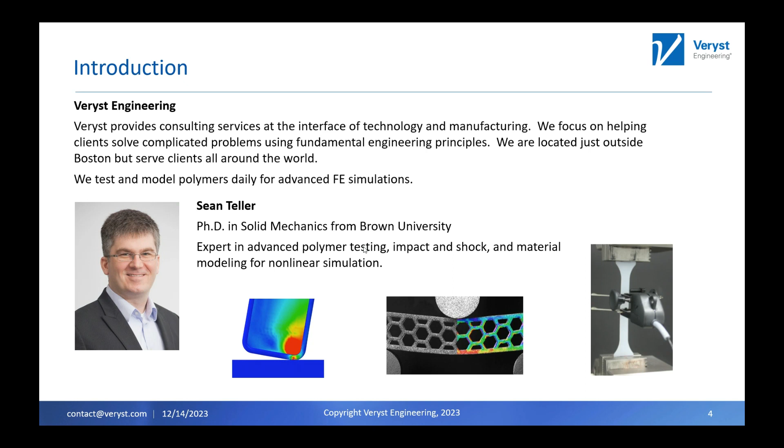And a lot of the work you're going to see here today, some of it was done by me. A lot of it was done by other engineers of us working in a group. So there are definitely a bunch of people here at Veryst who contributed to this. But these are really test methods that we have developed over the years based on client feedback and what we saw going on in industry and some challenges that we had and how we've overcome those challenges. So we want to talk about some of those capabilities.

And the first question might be, what do I mean by small samples, which we're going to show multiple examples of, but why do I need to test those small samples? And a lot of times we get a little bit of pushback from clients at the beginning that says, why do you need to test this? It seems like you're going to a lot of trouble. Why can't you just do a normal test? Why can't you use this other material? What's going on? Why are you doing this?

The first answer is that sometimes that's what we have, right? A lot of materials that we get are very thin and small. So for example, polyethylene films are used extensively in batteries. And ePTFE membrane, so that's expanded PTFE, are used in a lot of medical devices and consumer products. And these are all manufactured by extrusion. So you take these materials, you put them through some rollers at high speed, you squish them down, you extrude it out. So that stresses and yields the material already. It's just like cold working a steel beam or something like that.

And so the material properties that you get at the end of that film depend on that manufacturing process. So how they're extruded matters. So we can't just take a larger, thicker film of this ePTFE or PE. We need to use it as manufactured, because even testing a film that's 3 microns versus 100 microns made by the same company will have different properties, because those properties are dictated by how they're extruded.

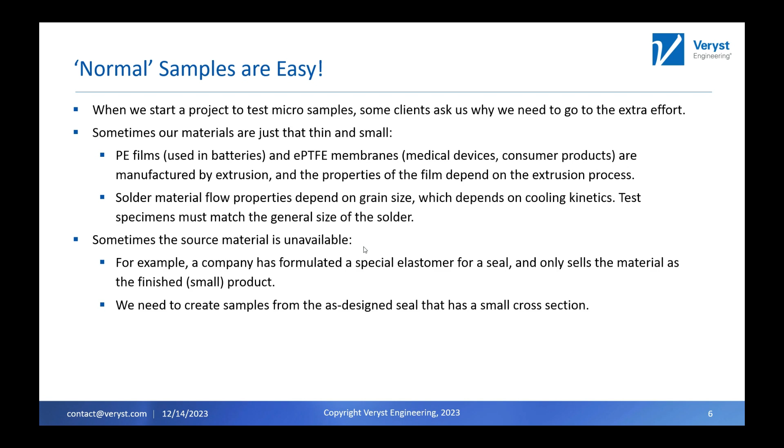And taking another step back, you might ask, well, why can't we just use a standard? Well, most standards don't anticipate these kinds of hurdles that you're going to have to overcome. And standards are really great. I'm showing ASTM and ISO up here. Those are two, one in America, one's international, but it's more European, I would say. But they both do great work. They have a lot of similar standards. I wouldn't say one is better than the other.

But they're designed to be able to run the same test at multiple different labs and get the same result. It uses standard equipment, standard methods, and then there's a 1 or 2 page document that says this is how you test the materials, and then everybody can get the exact same thing. Also, a lot of times those are designed to be run by technicians who maybe need to run 100 or 1,000 of these in a row, and you do the same analysis, so you automate that, and then you're good.

But in those situations that I'm talking about, it doesn't really work. A lot of the standards say this is the minimum thickness for the material that you need, and we're well below that. So what do we do? And then the last thing is we always go above and beyond, because those standards are meant to let people talk across industries, across companies, and give the same numbers and know that you're comparing apples to apples. But when we're doing this, we're doing it for a simulation. So we don't need to be able to compare apples to apples. We need that data to inform our simulation model to help our client update their design, build a better product, and get to market faster.

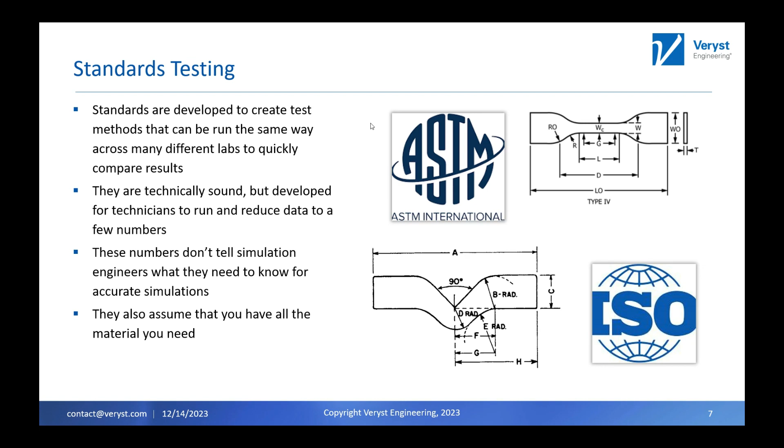So you're in this situation. You've got small materials. How can you step back and make sure that you're doing the right thing and not making up the Sean Teller test that gives you absolute junk? The first thing is to use measurement systems just like you would use for all those other ones. You want them to have similar or better levels of accuracy. Unless you really need to, you shouldn't create your own new load cell. You should use a load cell that's available. Otherwise, there's a whole lot of validation that you need to do.

But really, we need to focus on strain, displacement, and force measurement, and making sure that we're scaling that to the appropriate force, displacement, etc., and go from there. And then for sample sizes, you'll see that we base a lot of our sample sizes when we have non-standard geometries on those standards.

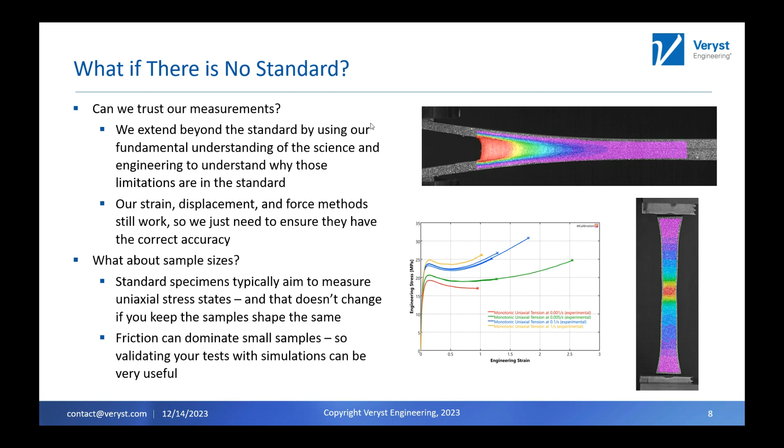I was talking to a friend from grad school who has a similar background to me, and he put it better than I ever could. He said, our PhDs, our experience doesn't mean that we can ignore the standards, but we know why the standards were developed. We know why they're constructed, why they are, and that means that we can change them because we have a fundamental understanding of the mechanics that are going on, so that we can then change them to better suit our needs, but not reduce the accuracy or fidelity of any of our data.

So hopefully I've convinced you that there are some instances where you need to use some small samples. So this first one that we're going to talk about is kind of the simplest one, which is smaller dog bones. So this has come to us from a lot of those examples where we get something of a manufactured part and we need to create a dog bone from it, but we can't get an entire standard dog bone. So for whatever reason, we use the ASTM D638 Type 5 dog bone, which you can see over here on the lower left.

This is the smallest size ASTM standard dog bone. There's a micro tensile sample. I have some personal issues with that. It's a little bit shorter, but it's a little bit wider, so it causes some other issues. But this is the one we work with, and all these dimensions that you see here are in millimeters. So you can see that the overall length is 63.5 millimeters. We're almost 10 millimeters wide. Maybe you're going to tell me, Sean, you could probably cut some of that off and be okay. And you're right, but we need a nice straight flat section here that's about 10 millimeters long and a little over 3 millimeters wide. And maybe we don't have that.

So we've created two other dog bone sizes based on these, where what we've done is a half size for the length. So you can see here we're 31.75. The gauge length is now a little 4 3/4 millimeter. But we didn't scale everything else. So the gauge width is about the same, so it's 3.18. Then we scaled the tabs here a little bit as well. So those are 6.36, but the width is the same, right? So we have less material, but it's still kind of 4 to 5 millimeters, easy to deal with.

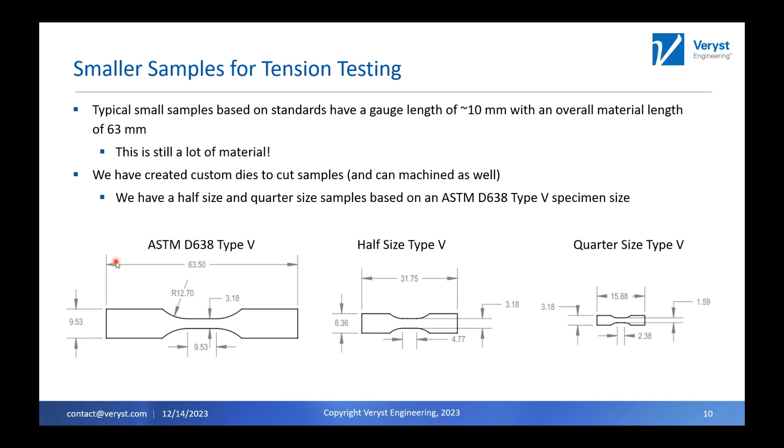So obviously you're gonna be like, well, how can you test this, Sean? Do you have some extreme dexterity? Maybe I used to, but we have some engineers here who are really good at this. So I put together a little case study here on using these. My daughter isn't old enough to be using Legos yet, so I went to my friend's house and I stole a couple Lego bricks from his son, and we decided to pull them apart to test them because everybody understands and has seen Legos before.

So this is that half-size dog bone that we're talking about. So what we did is we cut off part of the face with a bandsaw, and then we were able to die cut these out from there. We chose something that was flat, so it was nice to start. But we had these smaller dog bones, and we're going to go through some results. Over on the right, you can see the machine that we did this on. This is a standard universal test frame. This one is from a company called ADMET, which is located here outside of Boston in Norwood. We have two of their machines here. We love using them. You can see a temperature chamber down there in the back.

Currently, this one has fixtures in there for compression, and you can see an extensometer on there. But we're obviously going to do tension. And just to give you a sense of scale, we have what I would call a mid-size electromechanical load frame. This one can do 5,000 pounds or 22 kilonewtons. So not big, not small. I'd say that this is 18 or 20 inches across. I'm going to be mixing units here. I apologize for that. 18 or 20 inches across to give you an idea of the size.

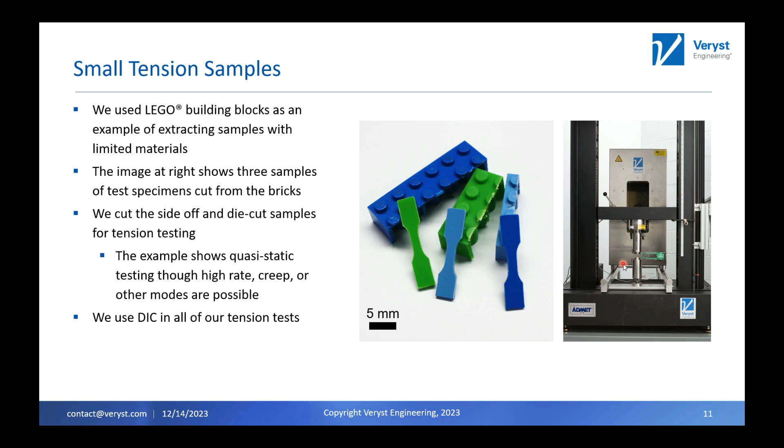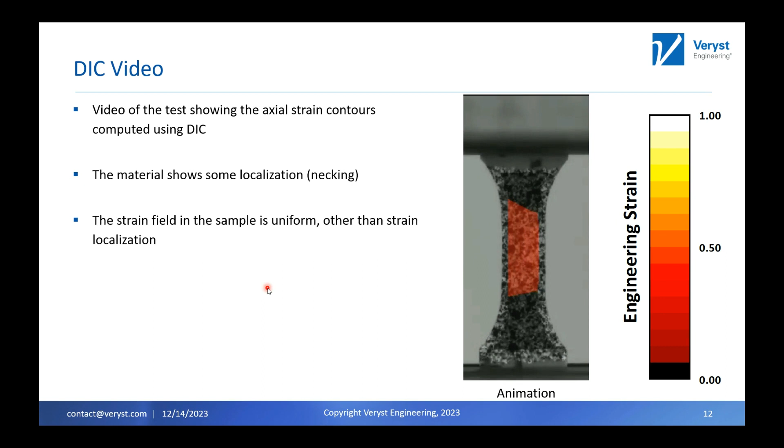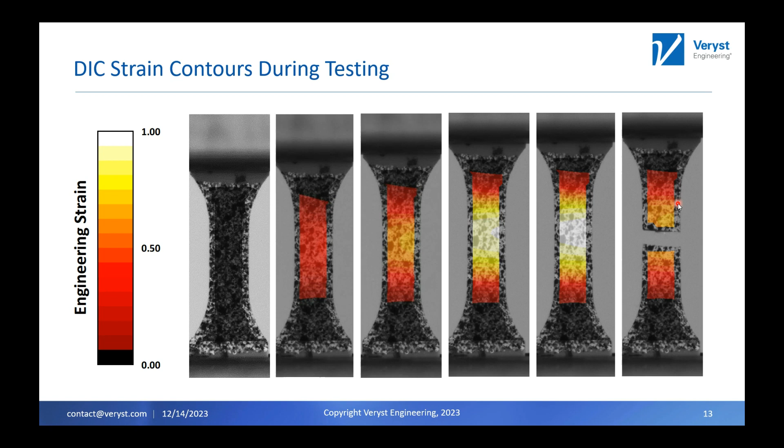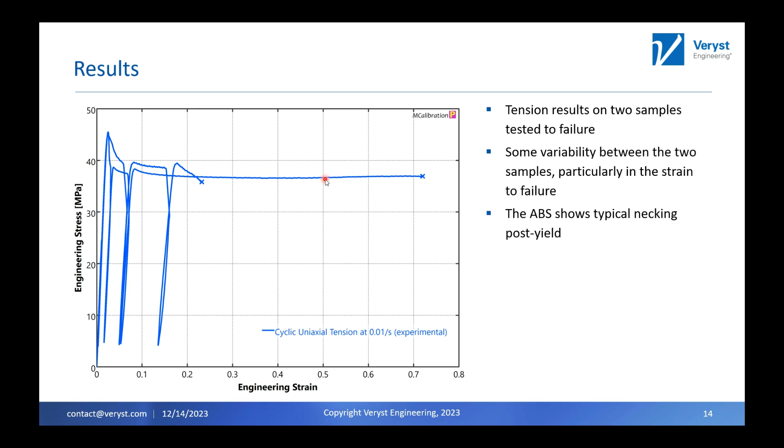So these have been through how many kids and how many UV cycles, we don't know. And one of these bricks could be 5 years old and one could be 15. So in a real use case, we'd want to really know the history of these bricks, but again, you just see a little bit of noise in the force, but overall you're getting the same response.

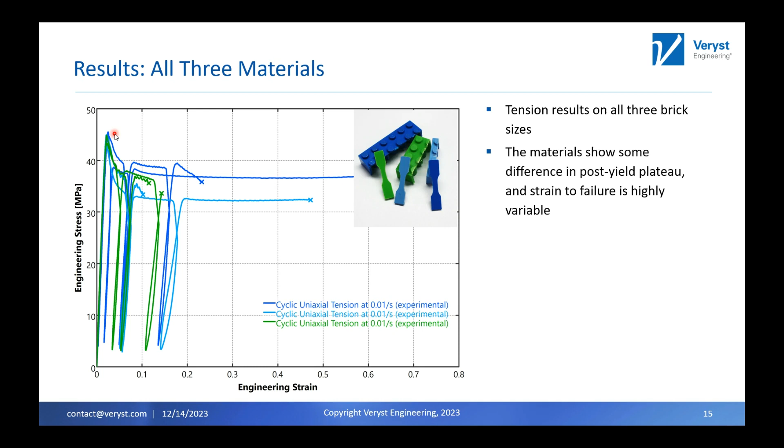So that was an example where you don't have a lot of material. Maybe you're reverse engineering something or reverse engineering the material and trying to understand it, and you've got to get a small sample out of something. So I talked about tension. I probably should have put compression next, but that's in a couple slides. So we'll talk about small compression in a second.

But this next one I want to talk about is very thin materials. So I had mentioned things like polyethylene films in batteries, adhesives in consumer electronics, OCAs or optically clear adhesives in displays in AR and VR devices, as well as membranes in medical devices can be very thin. We actually recently did some work for a client doing tension on dog bones that were 3 microns thick, so very, very thin there.

And so here we wanted to do an example. This one is a polyethylene film that we got that was 100 microns. And so this is really targeted at battery type applications because these types of films are used there fairly extensively. So we're going to do both tension and compression testing of this. The tension here is a normal type 5 dog bone, but it's 100 microns thick. But then we're going to do compression in the through thickness direction, which is one of the more interesting things.

Some clients are like, I can't believe you can measure forces that small. What do you use? So we have a range of load cells in our lab from 2.2 pound-force, which is just below 10 newtons, really up to 5,000 pounds. We used to have another machine from Instron that had died that we could do 50 kilonewtons. It wasn't something that we needed a lot of. But we go from 2.2 pounds all the way up to 5,000 pounds, and we've got 10 load cells or so in that range that we choose based on the application and the force that we need.

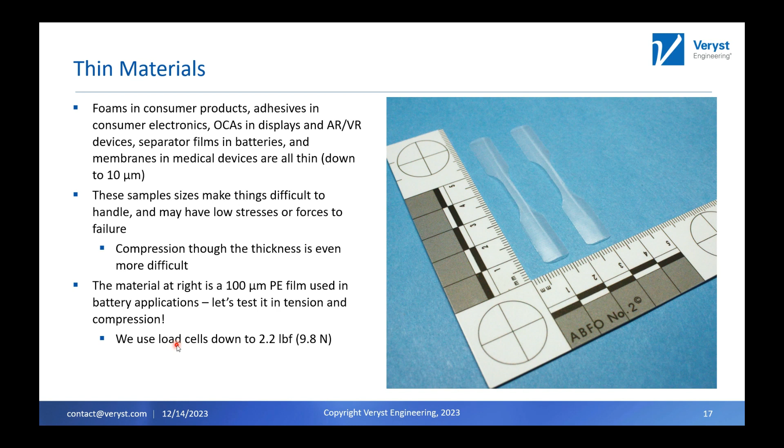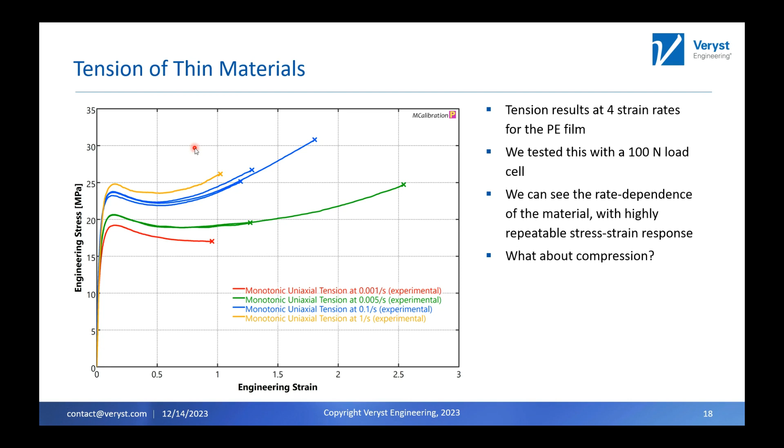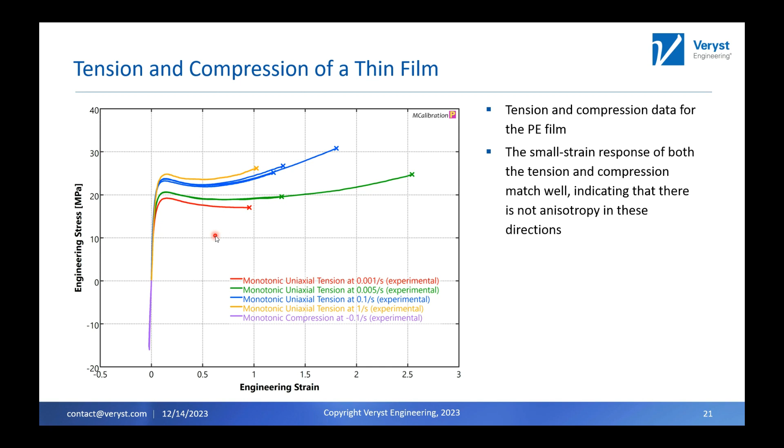So next, I'm going to talk about a different class of thin materials at high rates. We're going to be talking about foams here. But first, the question might be, why do we need to test materials at high rates? Why do we care about high rate versus low rate? So if you're not aware, almost all materials, and in particular polymer materials, are viscoelastic, viscoplastic, and that means that they have rate dependence. And I could talk for hours about where that rate dependence comes from, what it means, where you might expect it. But I think this is a good example on some nylon data that we tested.

Right, all of these are done at 4 different rates. This blue is done at 1 times 10 to the minus third strain per second, and this purple is up at 150 strain per second. Right, so you can see there are 2 big things that change. You can see kind of the behavior here below 10% strain. Right, we've got a much higher yield stress as we go to those higher rates, and this material became more brittle at the higher rates as well. And so if you weren't aware, that is something that you want to think about when you're designing your test plans. If you're doing things at impact rates, you want to make sure you get some data up there. If you're doing things very slow, you want to be in that right ballpark as well.

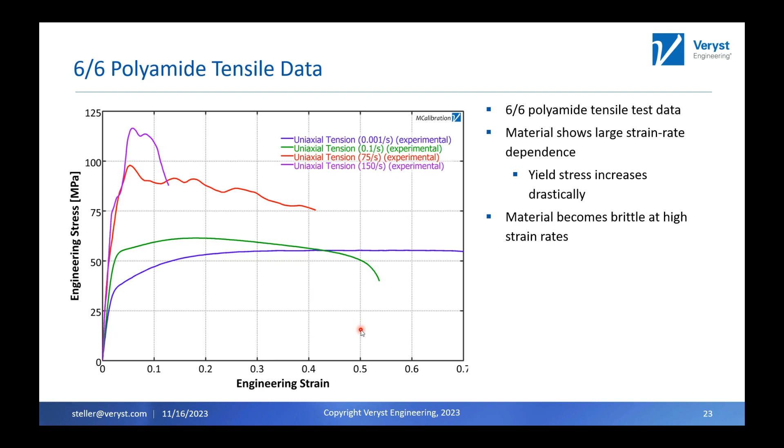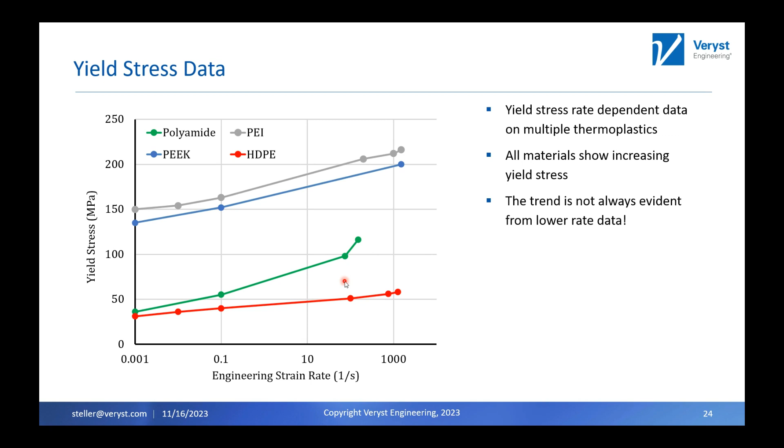So you might be saying, Sean, that's one data set. Here's 4 data sets that we have internally on our own data that shows the yield stress as a function of engineering strain rate. So you can see all of these have an increase. The x-axis is in the log scale, the y-axis is linear. So you can see that you're getting increase in yield, and sometimes you get some unexpected behavior where you see a transition at the higher rates. So that's why we need to test at high rates versus low rates.

So I want to introduce you to what we call our thin film test machine. So this machine was developed over years to test things like foams, adhesives, including PSAs and OCAs, and other soft materials at high rates. We often test materials down to 50 microns thick, very high resolutions, 0.01 microns. We can test thicker materials. We can test materials up to about 5 millimeters thick if we need to. But if we're getting that thick, it might be worth it to go to one of our other machines.

And we can test in multiple modes. So it's currently set up for compression. So the testing all happens down here on this end. So this is a dynamic load cell. This is a non-contact displacement sensor. And then this is our compression platen. And all of this is just to make that thing move.

So this is a pneumatic cylinder. We can pressurize it on either side and then release that pressure, and it shoots our piston either to the left or to the right to load the sample either in compression or tension or shear to the right. So right now, compression platens are pretty easy. We have some kind of weird fixtures that we can use to grip adhesive specimens and pull them apart.

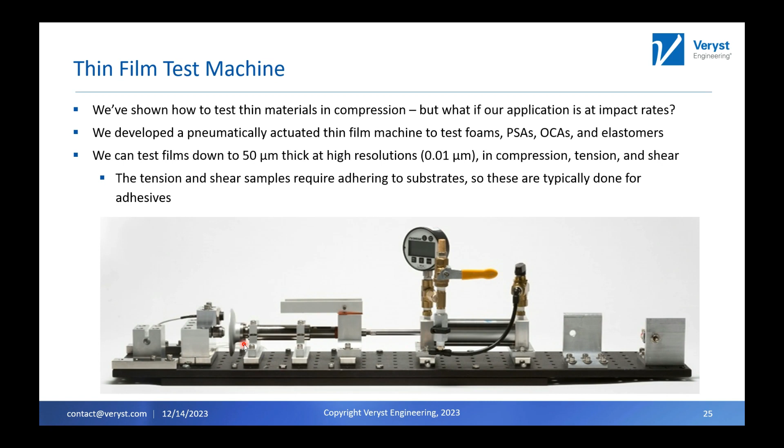I don't want to go into that today because we're really going to be talking about compression on these thin materials. So I'm going to show some data on a foam material that we tested, and I believe this foam material was a little on the thicker side. I think it was 400 or 500 microns thick. So compared to some of the other things we're talking about here, this is pretty thick compared to the 3-micron film I mentioned earlier. But this is the stress strain result for these on this machine, from a strain rate of 80 per second in compression to 1700 per second in compression.

I think this really shows one of the reasons why, particularly in foams, you really want to pay attention to rate. Foams have interesting behavior generally, right? If we start over here, they have kind of a linear or a pseudo-linear region, and then you get a stress plateau, which kind of looks like a yield behavior. And then as you follow that over here, at very large strains, you get what's called compaction. So this is basically when you pushed all the air, if these are open cell foams, you pushed all the air out of the material, and you're really starting to load whatever this foam is made of.

I think that we did a urethane foam here. Whatever this urethane foam is made out of. And so really you're starting to get the compressive modulus of the urethane foam. And so it's just so much stiffer here, right? 200 MPa versus 0.5 MPa here at 4 or 5% strain. So here we did test it for rates.

One downside of the system is that at some of the lower rates we can't get to the really high strains because the rate is tied intrinsically to the pressure that we applied and the energy that we put in the system. So we were only able to go up to about 15% strain at this lowest rate. But at these other higher rates, you can see that we're getting compaction up to 70, 80% strain. And you see a couple effects. The compaction here is basically on top of each other, but you have a different small strain response where you're getting stiffer and stiffer. That plateau stress increases.

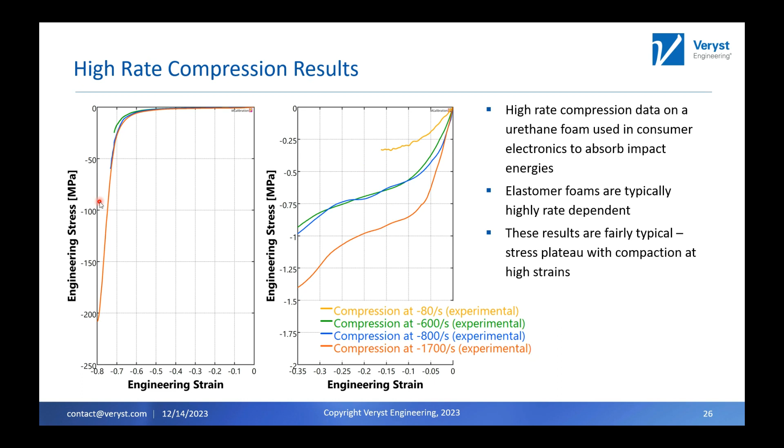So this one here, we're changing tracks a little bit to not just kind of straight mechanical tension compression type tests. This is something that we've been doing recently for some of our clients, where we really care about friction between very small things.

So, excuse me, I seem to be missing a slide. The question is, why do we need to test? I think I know where that is. Sorry.

Why do we care about testing friction between small things? Well, in medical devices, industrial equipment, manufacturing processes, a lot of times you might have small things that are sliding past each other and rubbing up against each other. And maybe you're getting a failure in line, and it might be related to the friction and that rubbing that you're getting. So understanding the friction coefficient is going to be important. Maybe you need to look at good versus bad samples, good versus bad lots, etc. But maybe troubleshooting really depends on understanding the friction.

You might say there are all these friction standards, we can just use those. But if you're using a small wire that's, say, 1 millimeter in diameter, or say you've got an injection molded manufactured part that has some complex topology and is very small. Maybe we've got a cross-sectional area of 1 millimeter that rubs up against something, and that's what you need to test. This is why we've developed that fixture.

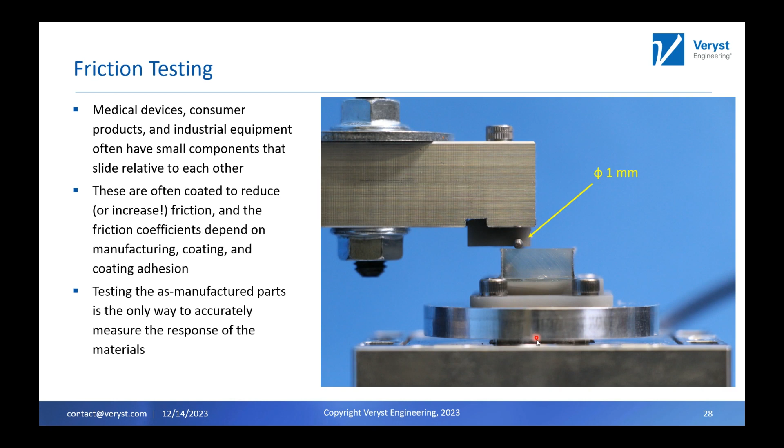So in my opinion, the beauty of this design is that we're measuring the normal force and the friction force throughout the entire test. We're measuring the friction between this surface and our load cell. There's nothing in between to add any drag from those linear bearings. We don't care how good those linear bearings are. They just need to keep us on track and make sure we're going in one direction and keeping things perpendicular. So as I said, it's a 3-axis load cell that's 10 newtons.

So here's a video of the test. I think this is on a slightly different material. We're moving at about 1 millimeter per second. If you focus here, you can see the model number of the load cell that we're using from Interface.

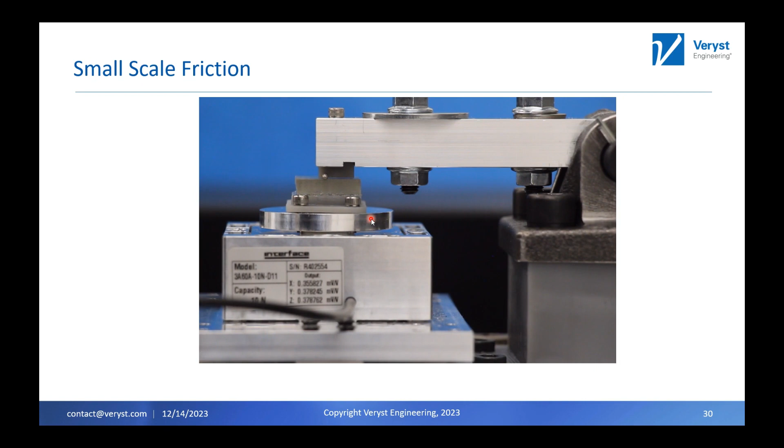But anyway, you can see that motion. We're just sliding along there. So Sean, the test looks good, but what does my data look like? So this is a plot of the force from one of these friction tests: the orange line shows the normal force, and the blue line shows the frictional force. So I've tried to point out here what's going on. We start the recording, and then we take that lever arm and put it down in contact to apply the normal load, and that's this jump. So we've got a normal load here of, we'll call it 1.2 newtons.

You see a little jump in the frictional force measurement as well, which makes sense. There might be a little angle on there. And then, we'll say 5 to 10 seconds later, we actually start the machine moving. So you see the friction force increases, and then we get stick slip. And then we went for, we'll call it 10 to 15 seconds. And then we could extract the normal force from that.

So this has been great for us. We've done a lot of macro friction tests with the sled. They work fairly well. There are always issues with them, but this data is cleaner than the data we've seen on the macro in our experience. We're getting rid of any of that other noise. It's just been phenomenal. And you can look at these loads that we're measuring. This friction force is 0.2 newtons, a friction coefficient of 0.2. In a project for a client, we measured friction forces from 0.05 or 0.06 all the way up to like 0.25. It's a great tool to measure these very tiny friction forces.

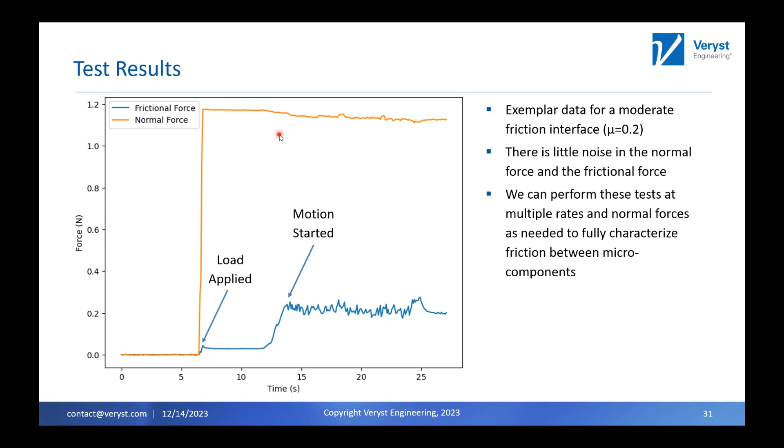I kind of prefaced this earlier. So this is some small cylinder testing. I'm going to go a little faster since we're only supposed to be talking for a couple more minutes. So we talked about those tiny dog bones, but what do we do for compression? So here are some samples of an elastomer material that we wanted to test that were extracted from another material. And again, it was a complex shape, and we did some grinding, cutting, die cutting, low-speed saws to get these

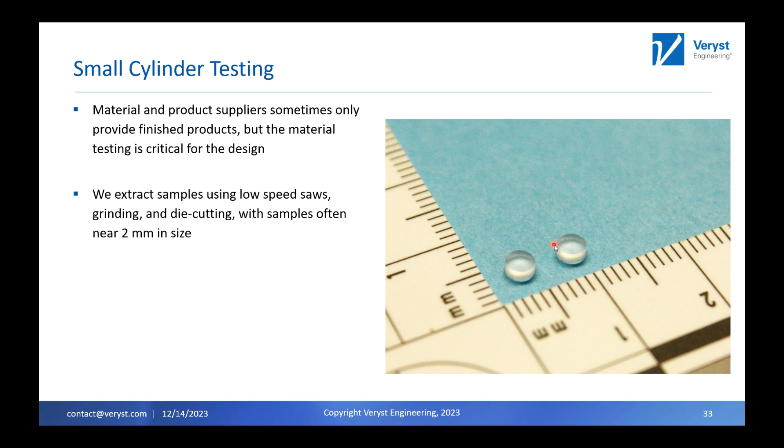out and get cylinders. So these are near 2 millimeters in size. So you can see very small samples. They're very hard to work with and play with. But can we get good data out of these? Of course, if I'm showing it to you, the answer is going to be yes.

So here's tests on those small samples that we showed you. So they're about 1 millimeter thick, 2.5 millimeters in diameter, right? So this is very, very tiny. If I hold up my little ruler here, right? 1 millimeter is just, my finger is maybe 15 millimeters wide, right? So these are just tiny.

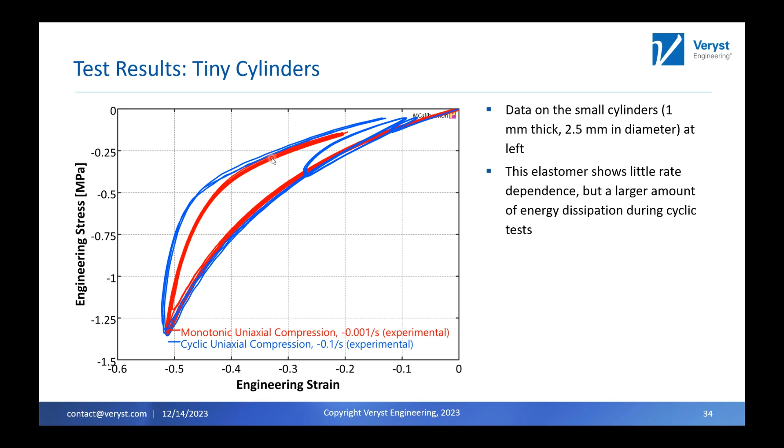So you can see here, the test data though is very clean, very repeatable. Again, we tested at 2 rates. This blue color was at 2 decades higher. We don't see a lot more difference in the stiffness, but we do see a difference in the unloading and the hysteretic behavior of these materials tested at 2 rates. Excuse me. And I think our last example is testing thin wires.

So just like the other ones, when we're talking about these thin wires, you're talking about things that have been manufactured in a particular way, and their manufacturing process changes how they behave. So some of the examples that we've done are for medical device stents made of nitinol. So that's what's shown in the lower left. On the upper right, those are some electrodes. Catheter guide wires are thin like this. The lower right, that's I believe an optical fiber. We've done optical fiber testing before as well.

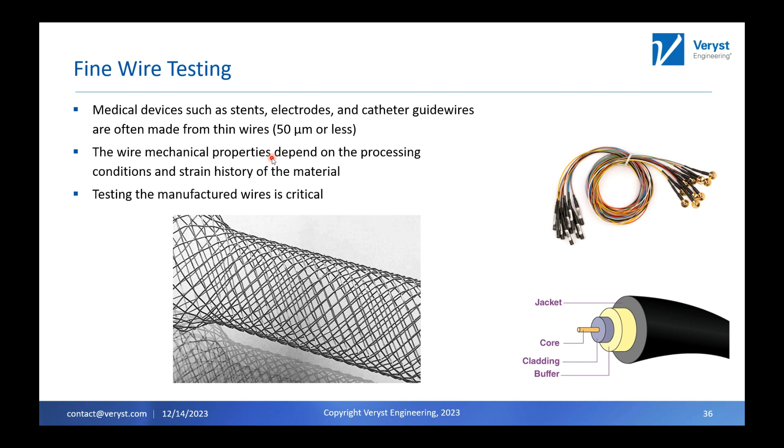So how can you do these? How can you test these? Because you need to test the as manufactured. So the answer is we just use our ADMET universal test frame. So here's a wire that's a 250 micron diameter wire. You can see here in this microscope image, right? It's a black wire. That's not that interesting to look at.

But here it is in the grip. So it's that same 250 micron wire. We're using just screw grips here. We've clamped it in between there. And then in this case, to measure strain, what we do is we add fiducial markers. That's what these are. So we track these with those same video cameras to measure the strain in between here.

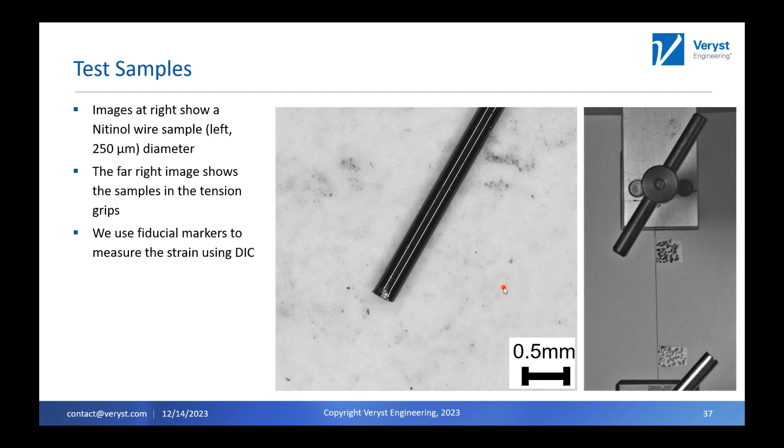The first question you might come up with is, can you go to failure? And the answer is not really. We test to failure. Failure typically happens at the grips, so it's going to be a conservative estimate of the failure. If you could give us lots of material, we could use a method with capstan grips, but generally our clients are only able to get 10 or 15 millimeters of this, and we need something like 300, 500 millimeters, probably even more than that, something on the order of a meter to do one of these tests in actuality with the capstan grips. And then you could get failure a lot better.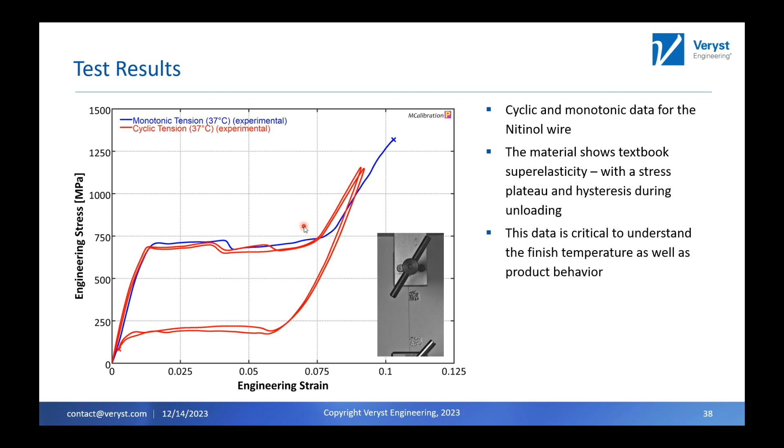So, particularly for nitinol wires, these types of tests are really critical because depending on how your wire is processed, these upper and lower plateau stresses, which is what those are called, will shift up and down. They also change highly with temperature. Sometimes you call that the austenitic finish temperature, which can tell you a lot about how the material behaves, and it also tells you how you can affect some of these shape memory effects. But testing those is something that we've done a lot of.

So the last one I'll talk about is something that we've developed here ourselves, which we call the benchtop frame. This is something that we developed to really be able to do really small displacements, small forces in a controlled manner, and we want really, really repeatable alignment. The ADMET universal test frames we have are great, but we're constantly taking things on and off. We use 8 different load cells.

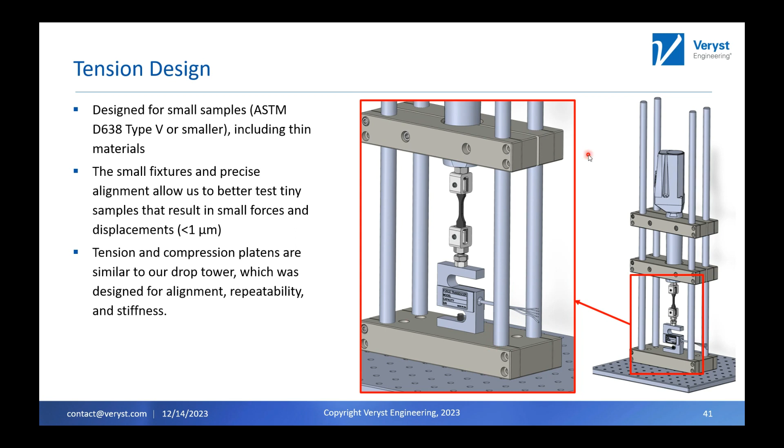You may or may not be concerned. Be like, Sean, you're a testing lab. You're not a machine design company. We have engineers who do machine design better than I do. And additionally, a lot of these components, we've used the designs in our drop tower. The drop tower is something that we designed 8 or 9 years ago and have been using since then, so we're really confident in how it behaves. Again, sample alignment and repeatability is what this is going after. This is a type 5 dog bone to give you an idea of scale.

So a brief summary: the summary that I would say is that sample size and the amount of material you can get me does not limit what I can test and the value of the information that I can get for you. I can get clean, repeatable data that really helps you understand your material, even if it comes in a weird shape, form factor, it's very thin, anything like that.

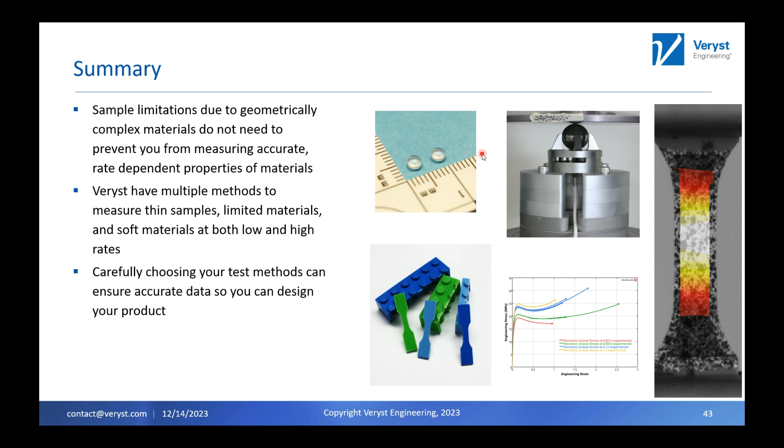These are some of our capabilities. I think there are a couple that didn't quite make it in there, but we like to tell our clients, really ask us. We like saying no. We think it gives you value if we tell you we can't do it. Come to us with the question. We'll let you know if we can test it as you think, or if we can come up with a method, and we'll discuss any pros and cons with you of that method. So that's it.

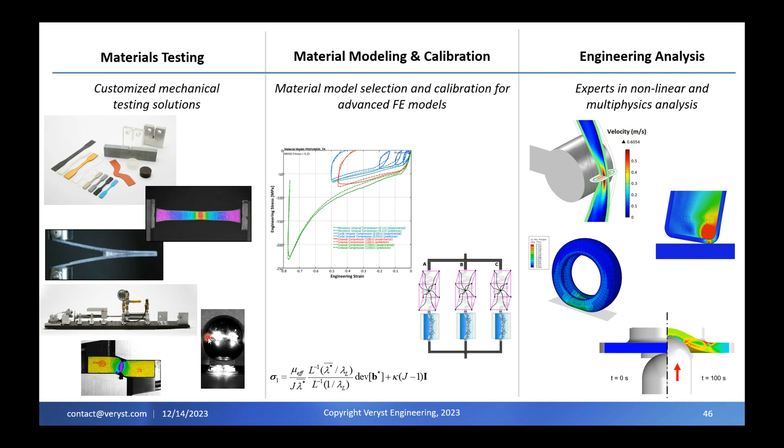Hey, Sean. I can't find the button for raising my hand. I'm used to Zoom, but good to see you again. Great talk. That was cool to see some of that stuff that you guys are doing.

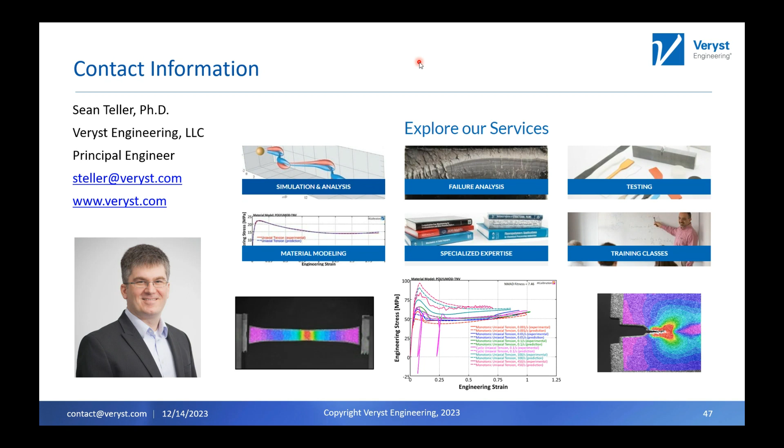I did have some questions for the thin film compression, that custom fixture that you made for the ADMET. Are you guys concerned with friction between the sample and the platen for that, and concerned with barreling or any of that stuff, where in the past we've tried to reduce the friction between the material and the platen? Is that something you worry about for those tests too?

Yeah, that's a good question, Greg. Yeah, we do. We try to lubricate. We may or may not go to very high strains because of that. Because, as Greg and others on here might know, the higher you go you start to get what's called a barreling effect, where you get a non-uniaxial stress state due to the friction between the platens and the compression. The higher strains you go to, the more error that is. By lowering the friction, that reduces that effect, but obviously it doesn't eliminate it unless you have no friction.

So we will add lubrication in there. This 6 millimeter sample size, we kind of choose based on what we're trying to get. If we want to go to higher strains, we might go to an even smaller sample to get a better aspect ratio. And when we do this on foams, we don't worry as much about that because they have a much lower Poisson's effect, and therefore that effect is much less pronounced. So the answer is yes. I always worry about friction.

Yeah. And good to see you too. For those who may not know, Greg used to work with us here at Veryst, so he's gone on to greener pastures. But he helped develop some of these methods years ago.

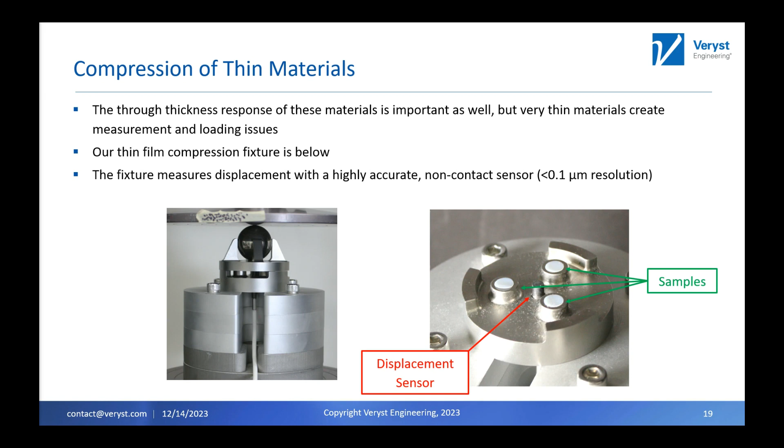Very good, very good. Many thanks for your explanation. And just one more question for you, and that's all. What kind of motors are you using in your setups? In our universal frames that we bought from ADMET, I don't know. It's electromechanical. That's why we buy it from them. They know what to do there.

In the benchtop frame that I showed somewhere here, I think. Oh, there we go. This one we got from PI Physik Instrumente, which is a German company. It's a piezoelectric actuator, very small displacements, very well controlled. You might be able to get something similar from like Maxon, but we've worked with them before and we like theirs.

Thank you very much. I won't take much more of your time. I will ask you a couple more questions on your LinkedIn account. Thank you very much for your explanation. Yeah, thank you.

Let's see, I got one. It's from Isaiah: can you explain some of the sample preparation methods or tools you use for soft or hard materials at different scales under compression and tension? So all the dog bones that you saw here, we used die cutters, steel ribbon die cutters.

So the Type 5 is a normal one that you can get off the shelf from a lot of people who make those dies. And the smaller ones, we just provide a drawing to the same company and they'll make a custom one. So that's how we do the tension samples. We've also done things with water jet cutting and machining, but machining these very tiny samples can be difficult.